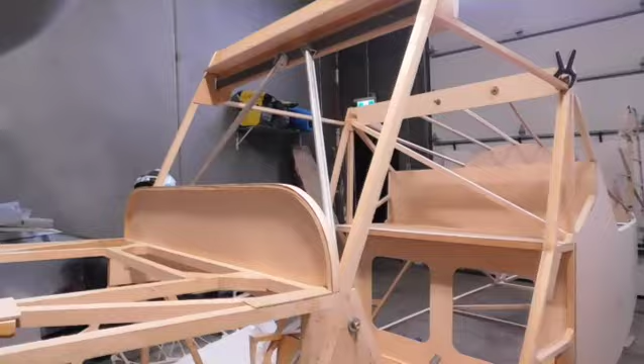Where are we at? Just doing some of the hardware stuff. I've got those into place. They're all cut. Nothing's tightened up yet. They're just sitting where they're supposed to be sitting.

I'm trying to get some work done on the stick. So I'm cutting it, putting it into place loosely just to see how everything's going to work. Got this little doodad set up. I put a couple holes in here for now. Made it a little longer with this extra hole just to give.

I wasn't sure about this sideways motion here. So I wanted to make sure that I'll have adjustment here if I need to move it over and get a longer throw going there.

This piece is supposed to hang over. I didn't want to glue that down yet until I find out exactly what's going on there, because hanging it over is dumb. It should be solid under there, or I might have to put a block in here, which isn't shown on the plans, to tie that down.

There's a couple lines I've got measured on here, there and there. That's where the two screws go through to hold everything here. Now the one screw would be here and one screw would be here. This screw would be in, and there's a platform that goes across with the other screw here just to hold all that good and tight.

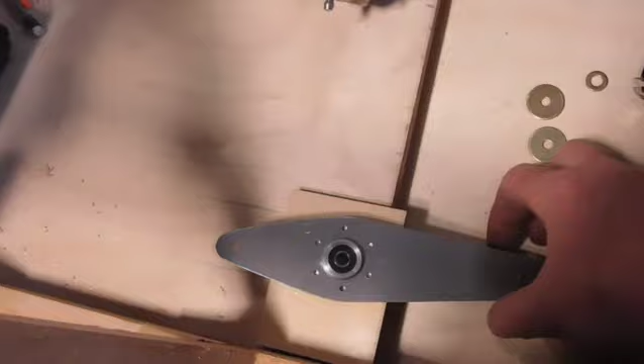So back to this. Front position, outside position, or outside and inside position. If you look on the plans here, there's the stick. This clearly shows it on the outside position. There's a screw going through here and the screw going through the axle portion there. Outside position.

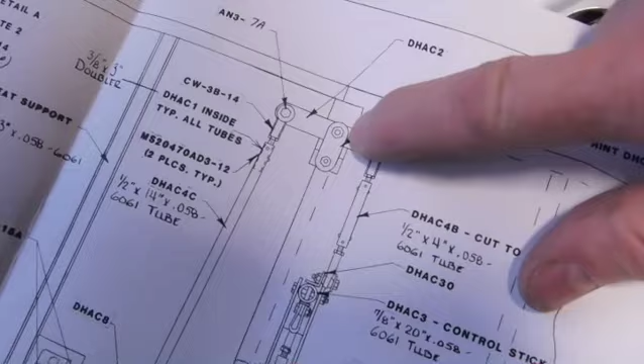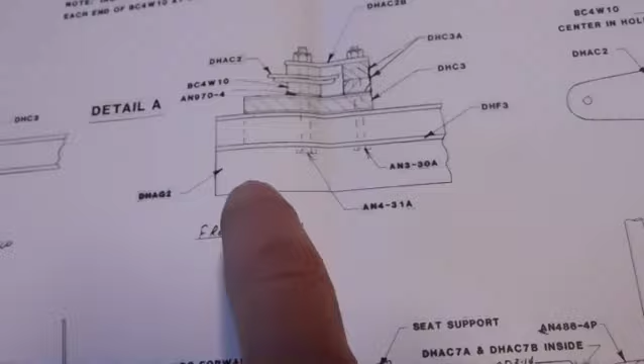When you look at it on here, this says front view, and this clearly shows it. If we're looking from the front, this is the outside and this is the inside, and it shows it on the inside. So is this front view looking to the front, or is this from the front looking back? When you usually say a front view, you're looking from the front. That's like this is looking from the top down onto it. This is looking from the side.

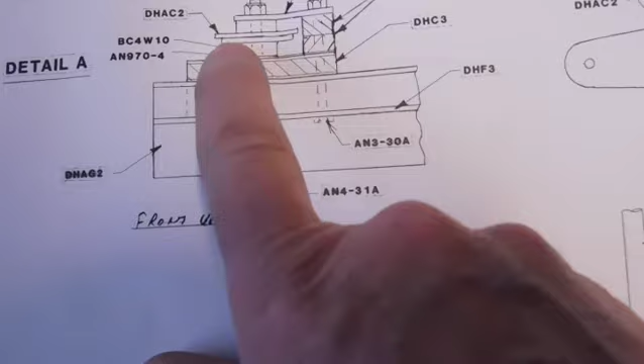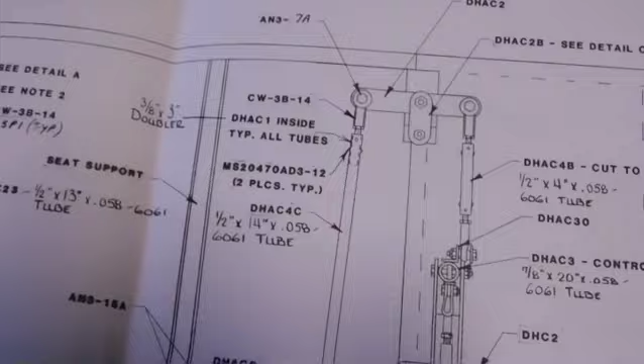So if this is actually the front view, they have the control arm, or whatever you want to call it, the arm there, on the inside, and this would be the outside. But on this plan, they've clearly got it on the outside and the inside. I'm not sure that it makes a difference. That's why I just wanted to place everything before I start finishing up everything where it's at. I want to make sure everything fits properly.

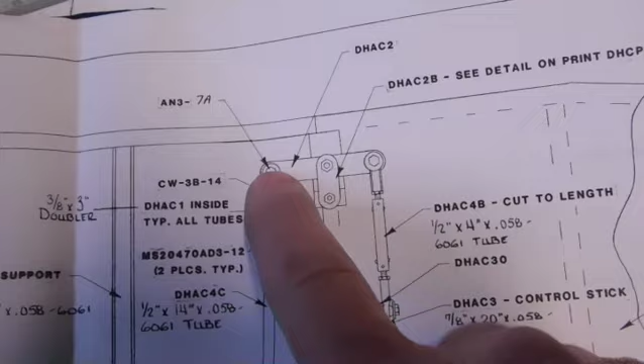One issue I can see with it being on the outside, this motion might be limited by hitting the wall there. So if this comes all the way forward and this goes back that way, it might hit the wall here, where if it's in the interior position, you would have more play. So I'm not sure. What has everyone done there?

All right. Just getting the rudder attached.

Question. When we're putting this on, do you attach to the fin permanently and take the rudder off to cover it and use the bolts on the rudder? Or do you attach the rudder with the bolts permanently and then cover this and put the holes through on this side? Doesn't really matter, I don't imagine, but just curious as to what everyone does with that. Or do half and half, both.

Leave the hinges out totally, then cut a slot in the fabric after everything's covered, and then pop the holes through the fabric and put the bolts on the outside. I'm going to go back and watch Elgie's again and see what he did for that, and go from there.

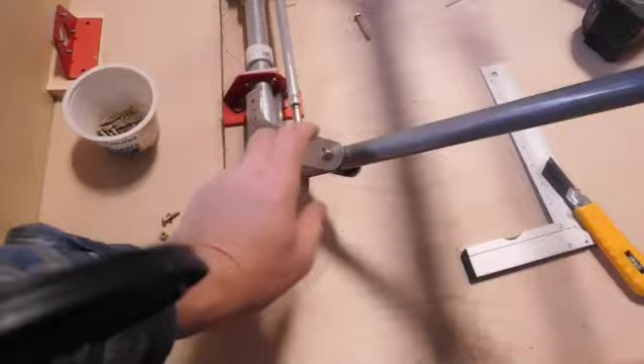Some of these bigger parts, I barely have room in my anodizer. I'm only using little containers to do the anodizing, so this won't fit. This would barely fit. I'm not going to worry about the torque tube there. I'll shine that up probably and let it go.

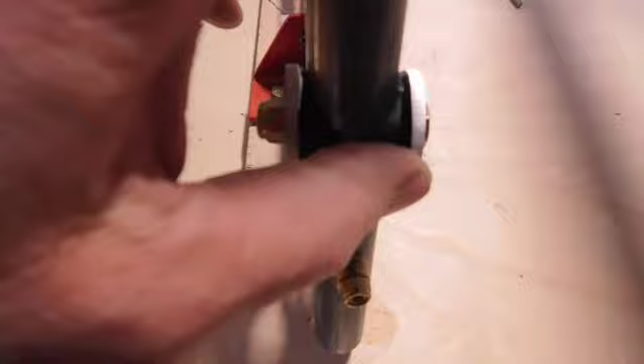Here's the things I did with a 3D printer. I don't know if you can see that, there's enough light here. These little things I made with a 3D printer, and they really work well. Can you see them in there?

That was a good idea. When this is clamped on here, that gives a nice flat surface, if I could focus it, for that torque tube to go through.

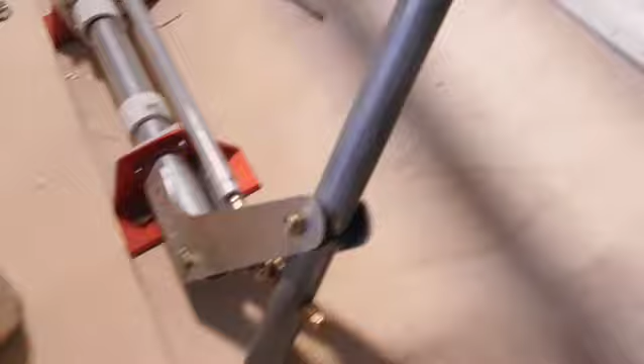That's the only real surface with the stick, is that one, or these two little things that sandwich it in there. And without these little things, it's just a small surface that touches all the way down the center line, so that doesn't give a lot of stability.

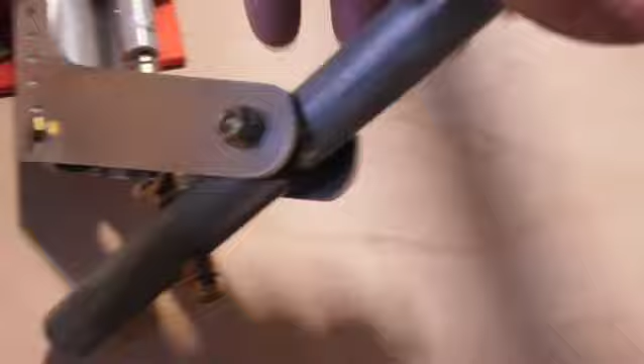With these little 3D printed things, it's good and solid on that tube. It gives pressure all the way around the tube there. So I would do that for those people that are doing something with a torque or a stick and it's only one screw holding everything together.

Just build a little thing like that, and that holds it nice and tight in there. It's not tight now because nothing's tightened up, but I think that was a good deal to do that.

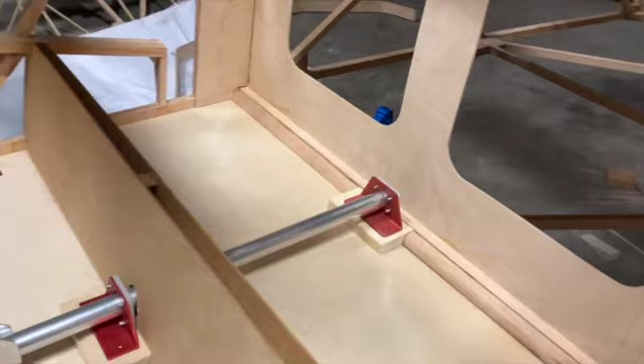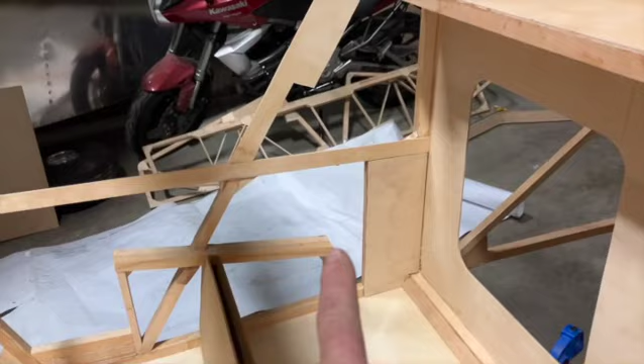Okay, just a word on everything here and the seat. Now the seat, I'm assuming goes from there to there, and from there it goes up to there. I put it in place, and that's pretty upright for me. I like to lean back a little bit.

And I like to have a little bit more room for my butt. So if I build the seat a little longer, I can have it at a little bit more of an angle just to get more comfortable in there.

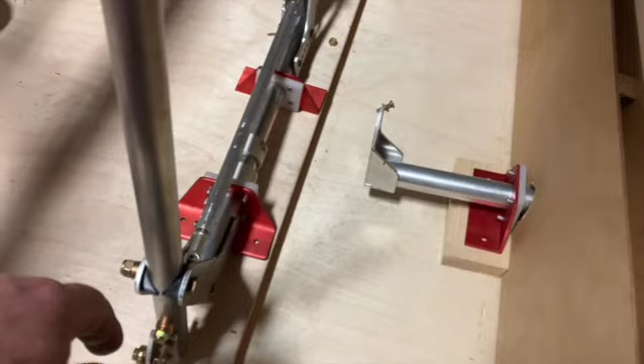One other thing, we've got all this is going to be connected from here to here and then from here to here. I don't like the idea of the seat ending about here and having that all exposed to things that can fall down onto it.

Has anyone thought of coming out a little bit further with the seat, have a bit of a cutout in the seat for the stick, and building something over top of all this mechanical stuff that can get jammed? If something falls out of your pocket, gets jammed in there, then you're hooped.

You're panicked, you're wondering what the heck's going on. If there was just a cover over everything all the way along, that's why I'm thinking if the seat was out a little bit further, then went straight down over top of that, you could hide all that, have it under the seat where it's not going to get in anyone's way.

Has anyone done something like that? And then from the other side too, you've got a bunch of doohickeys there to send the elevator arm back over there, so there's a bunch more happening over there as well. If all that was covered by the seat, instead the seat ends here and it exposes all of this stuff to things that might fall onto all your inner workings that's going on there.

If the seat came out a little bit further and covered all that up, and then you just put a little cover over top of it so nothing can get into the workings of that. Or is there something that covers that? I haven't got that far in the plans, but from what I see, there isn't.